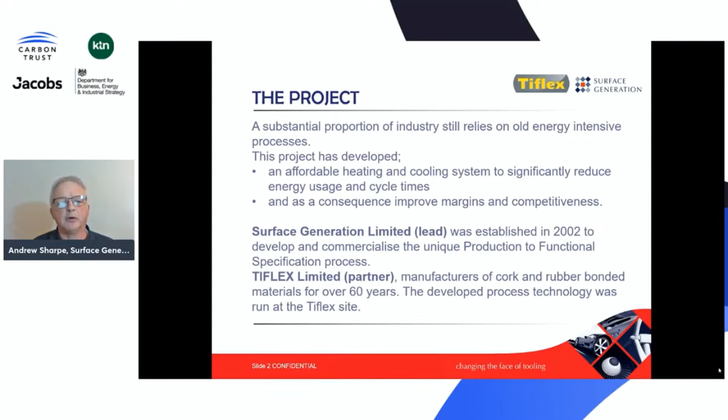So Surface Generation, we're the lead company. We were established in 2002, and we were developing a unique technology called production to functional specification, which is called PTFS basically. And Tiflex, a long-standing partner down in Liskeard in Cornwall, they were manufacturers of cork and rubber bonded materials. So probably when you step on a tube train, if you look at the floor, those guys probably made it.

So the technology is all about really zoned heating and cooling. What we were trying to do was take the mass of the tool out. So what we'd look at is a tool face, which is extremely lightweight, which takes very little energy to heat and cool. And what we're trying to do is just heat the tool face rather than the whole of the tool. So traditionally, you might heat a tool that's 50 kilograms in weight up to perhaps 130, 140 degrees C, which can take a lot of energy and a lot of time.

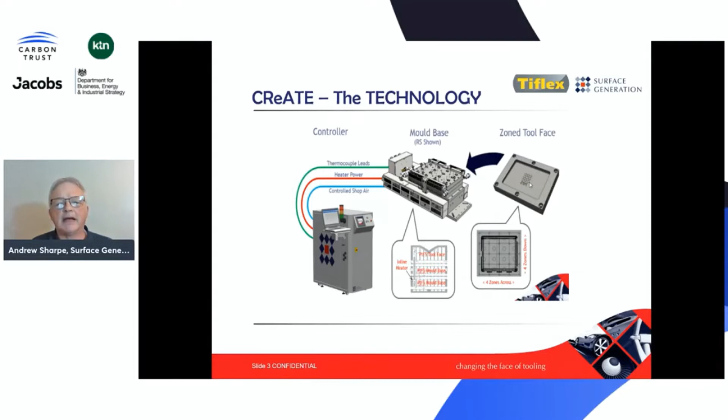But if you actually only heat the tool face, which weighs perhaps 2.5, 3 kilos, then the energy used to heat that up to 130, 140 is much less. And also the energy is far more directed. It's directed at the tool face rather than losses through pipes and things.

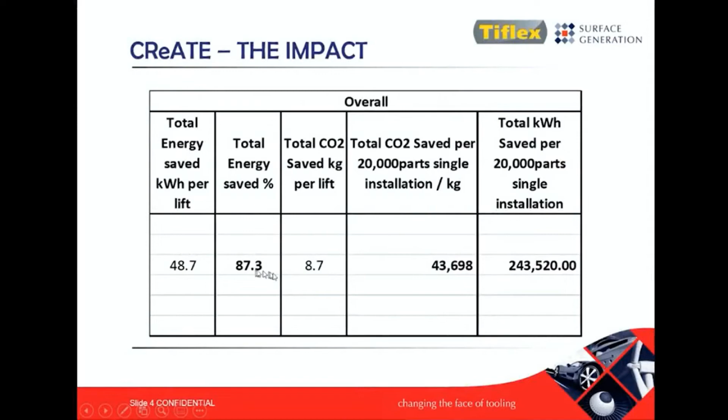So the impact of the project was actually pretty impressive. We were very pleased. In the proposal, we estimated about 82% energy saving. And in the end, we actually achieved 87.3% energy saving, which equated to just over 43 tons of CO2. And we were saving almost 250,000 kilowatt hours of energy.

And this was done because we lightweighted everything. We took a lot of the weight of the tool out. We directed the energy at the tool face. And we were able to then use a new control system, which enabled us to reduce that cost and reduce the cost of the complete installation.

Originally, our system was based on aerospace technology and was very expensive for just the molding industry. But on this project, as some of the benefits, we managed to reduce the cost of our system considerably to bring it more into line and more economic for the general molding industry.

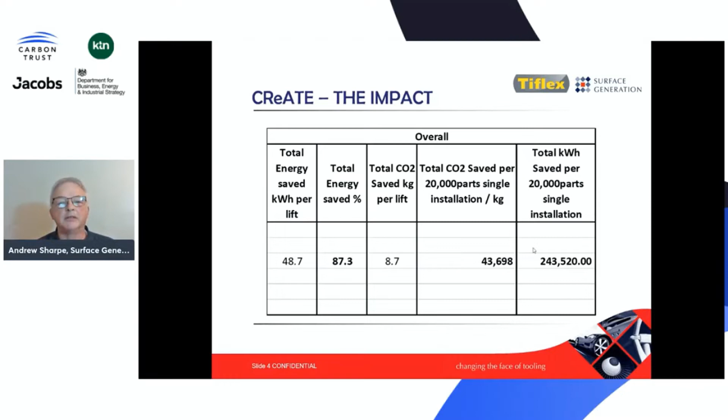Tiflex originally used steam heating to heat their tooling, which was very, very inefficient and used a lot of energy. And as I've just said, we saved 87% just using electrical energy over their traditional steam energy. And of course, today with the price of gas going up, which they use to actually create the steam, this is extremely beneficial to them potentially in the future.

So we were talking to Steve Ward, who is the R&D manager down at Tiflex. The lower energy consumption that we've shown them is obviously a significant benefit for them. If we can reduce their reliance on steam generation for heating and cooling, that'll allow them to grow a more sustainable business. It will allow them to have a more competitive business as well, which will allow them to hopefully have more money there to invest in further technology developments to reduce CO2 levels.

So what are we going to do next beyond the IEEA? Well, we're going to harden the tooling. So there's a few areas that we know we can just make slightly better. And we're going to exploit the developed technology in the general molding sector. So other companies like Tiflex who do general molding, compression molding potentially, that's something that I'm sure we can help out with.

And furthermore, what we'd really like to do, as well as the general molding sector, is look at other sectors which are very energy intensive, such as advanced composites. For instance, autoclaves use extreme amounts of energy. If we can find a way of eliminating the autoclave or reducing its usage by using our technology, then that'd be a great thing to do.

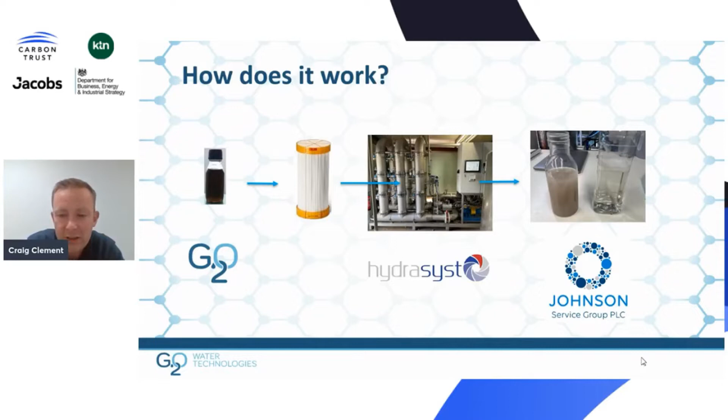What's been the impact of our project? What savings have we demonstrated? Well, the savings amount to more than £100,000 for the Shaftesbury operation. The largest financial saving is in the water. We've reduced water use by 60% by recycling, amounting to 24,000 cubic meters across a year. We've saved over a gigawatt hour of energy, based on a calculation of washer efficiency around 80%. We intend to further validate these gas savings with a 3-month test period with Johnson's from December to February 22. This saves around 200 tons of carbon per annum.

Good morning. I've been asked to come along today and talk to you about our IEEA project, the simulation-aided control of the drying process in the paper industry, or as we prefer to call it, twins.

The concept of twinning is not entirely new. The highest profile and one of the earliest examples of digital twinning was the Apollo 13 moon mission. At around 2:07 Universal Coordinated Time on the 13th of April 1970, when the Apollo 13 moon mission was over 330,000 kilometres from Earth, a dramatic explosion tore a hole in the side of the service module, leaving the spacecraft in distress.

Obviously, NASA put in place emergency procedures to bring the crew home safely, but then they were faced with the challenge of flying an untested spacecraft in a completely new configuration around the moon and back to Earth. In order to achieve that, they made use of the training simulators that had been developed to train the astronauts back on Earth. They converted the training simulators into models controlled by computers, and were able to model the performance of the spacecraft and the systems on board.

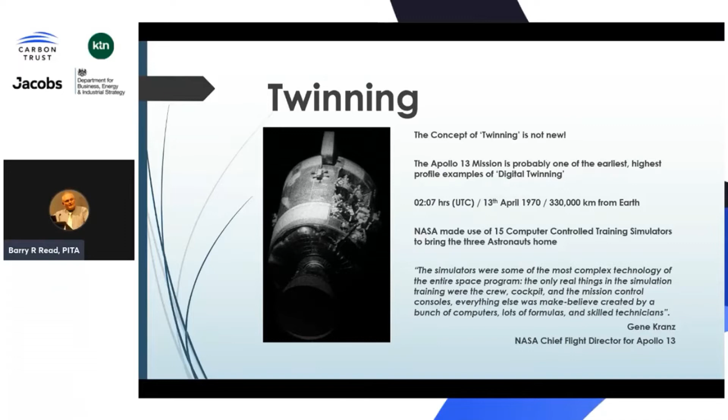It's important to make a few points about digital twinning. As I say, it's not new. The term was first coined in 2002. Historically, it's been used for relatively slow moving environments. But the first use of the term is in a NASA roadmap report. NASA are quite active in this. As the performance of computers has increased, so the capabilities of digital twins have increased alongside them.

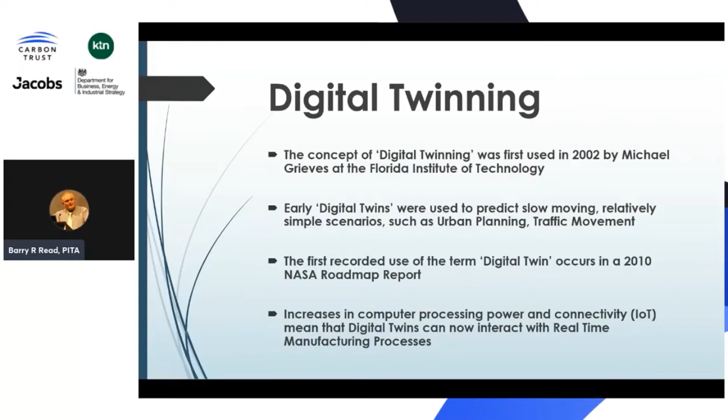A quick word about models. We're all used to using conventional models of systems. They tend to be data-driven and they are highly accurate within the bounds of an existing process, and they're used all the while. These can be extended to predictive models that can extrapolate forward with reasonable accuracy changes in that system, and those are quite widely used as well.

Mathematical models are different. Mathematical models go back to basic physical principles and mathematical equations to calculate variables either within or outside the existing boundaries of an operation. And this enables us to move into new areas outside of the knowledge that already exists within a system. To carry the space analogy forward, a mathematical model allows us to go where no man has gone before.

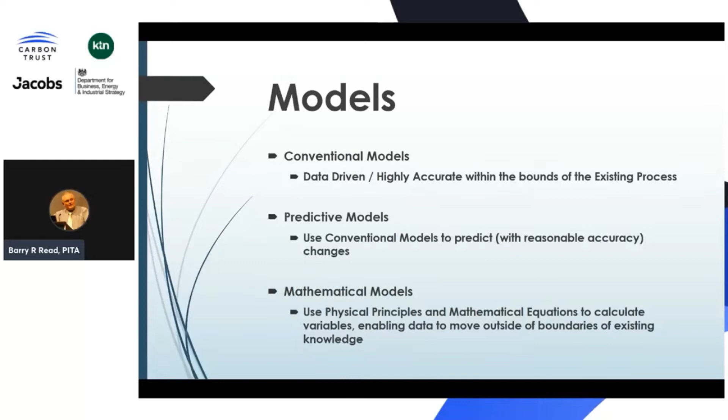Let me briefly introduce you to the project team, the partners. Obviously, the main one is Smurfit Kappa, who are the paper mill who allowed us to use their facilities. I'll tell you a little bit more about them shortly. CF Proxim is the key technology developer, based in Austria. Automation X is a process control specialist company based in Austria who work very closely with CF Proxim, and Perceptive Engineering is a similar process control company in the UK who work very closely with the Smurfit Kappa mill. And of course, propping it all up at the bottom, you've got the Paper Industry Technical Association, where I'm from, who are a membership association serving the pulp, paper and board industry globally.

A little bit more about the Smurfit Kappa mill. It's a 150-year-old site, which formerly had two older paper machines producing 230,000 tons of fine paper. Around 2014, that was converted to packaging grades, and they then subsequently invested in a new CHP plant to reduce carbon emissions. They're capable of making 260,000 tons of packaging paper, but with the drive towards lightweighting, that figure's been reduced to more like 230,000 tons because paper is produced in square meters rather than by weight.

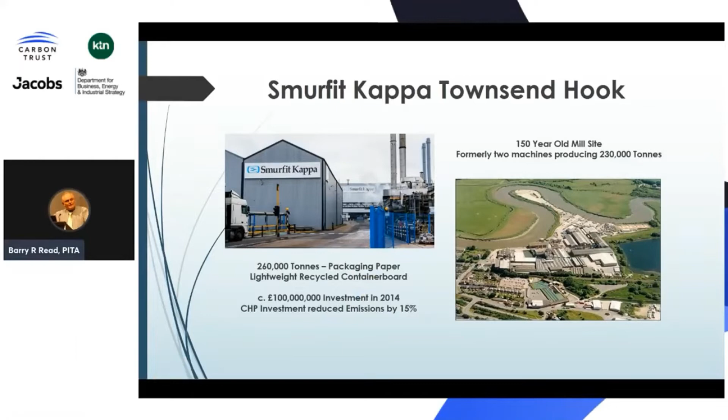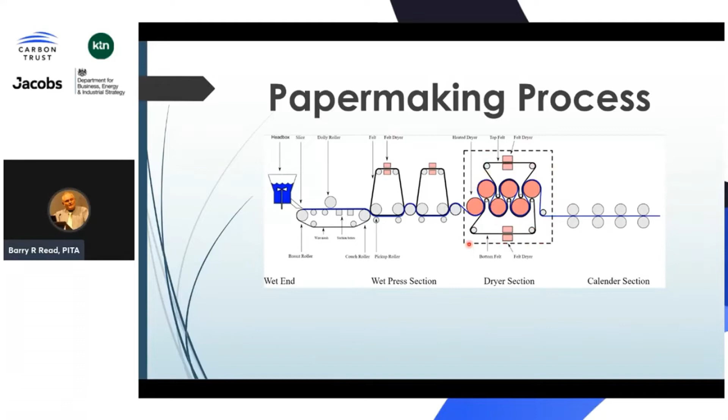This is the basic paper making process that the mill operates. We pulp paper up, we squirt it onto a wire like a sieve to let the water drain out. We then put it through two presses, very large mangles, which press water out of it. And then we take it into the drying section where we use heated metal rollers to drive the remaining moisture off. Now, the Smurfit Kappa system is slightly different to that, in as much as they have two sets of dryers because they add chemicals in between, but they're both basically the same.

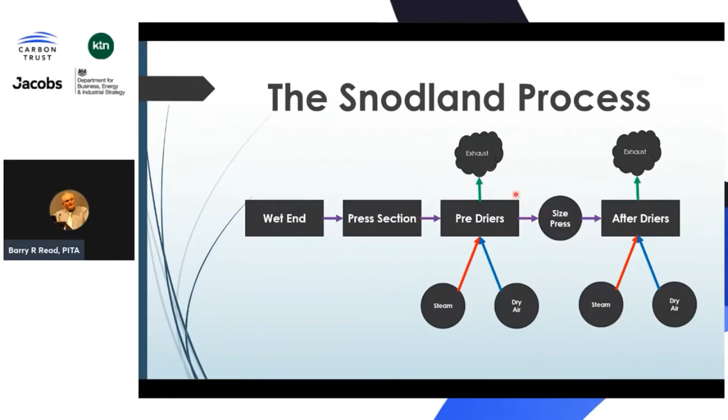Steam and dry air are put into the system, and warm, moist exhaust air is extracted to atmosphere. This is very fortunate because it means we can do work on one section and test out ideas that we're going to use on the other section, which is what we're doing at the present moment in time.

The achievements to date: it took a lot longer to complete than anticipated due to COVID-19, and nearly 600 days elapsed from our first meeting on site to our second meeting on site. But we got there, and as you can see from the graph at the bottom of the page, the results of the simulation and the measured results are exceedingly good.

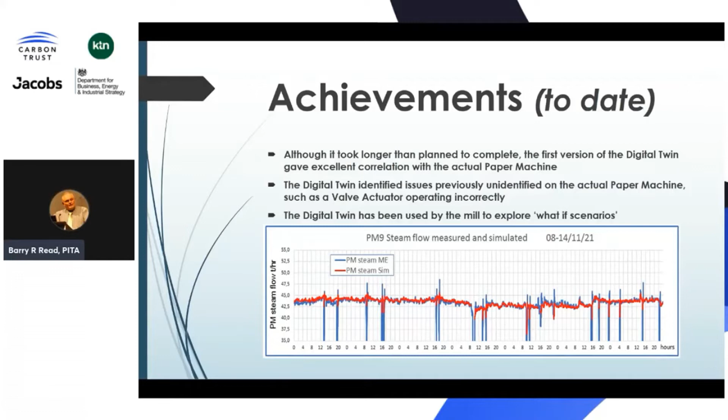The mill were very impressed by the correlation between the two. The twin has already identified certain issues on the paper machine that people didn't know were there before, like a valve actuator being connected inappropriately. It's also being used by the mill to explore what-if scenarios without putting production at risk. The mill are able to move outside the box while still making paper in the normal manner.

As I said before, we started on the after dryers, and the immediate results are that the exhaust fan speed has been reduced by up to 35%, so that's 35% less hot air being exhausted to atmosphere. We've reduced the supply air temperature from 105 to 80 degrees C with no loss of drying performance on the paper machine. On the after dryers alone, we're estimating a steam saving of 2 to 2.5%, which in papermaking terms is quite significant.

We also have a range of advisory functions. When the model sees performance moving in a particular direction, it is able to step in and make changes to the system. And we can also measure performance in key areas where it might not be possible to make any measurements.

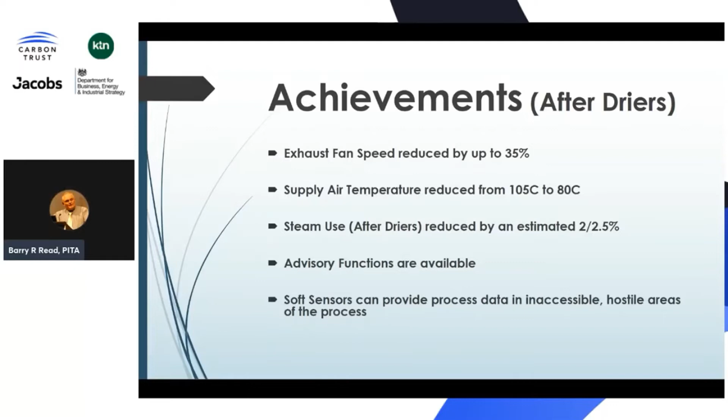This is a comment taken from the Operational Excellence Leader at the mill, a gentleman we've been working with very closely.

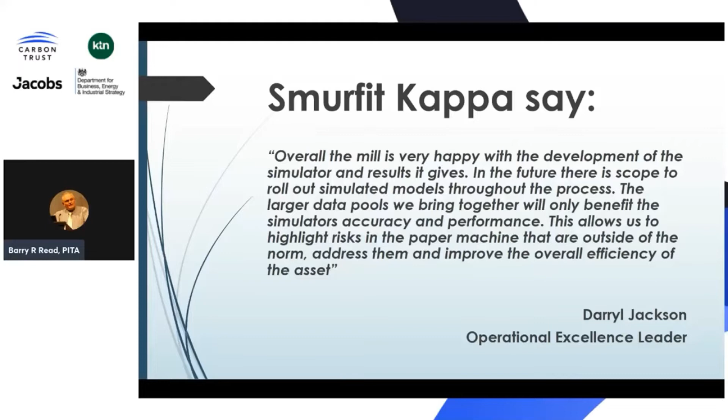So what next? We intend to extend the control of the pre-dry section, which could result in another 2 to 3% steam saving. We can also look at the heat recovery system in the condensate to save a further 1%.

The technology, well, there are 43 paper mills in the UK producing 3.6 million tonnes of paper. This could be replicated at the majority of those. And there are 894 pulp and paper mills in Europe, and this would be applicable to those mills as well. So the market potential is huge.

Thank you for listening to what I've got to say, and I hope you find it interesting. And to continue the space theme, live long and prosper.

Thank you, Barry. Now we're moving on to the Mineral Products Association. If you joined our panel discussion earlier today, you will have heard Richard Leese already mentioning their IEEA project. MPA have developed and tested low carbon multi-component cements for construction applications, thereby reducing the need for energy intensive cement clinker production. Richard, over to you.

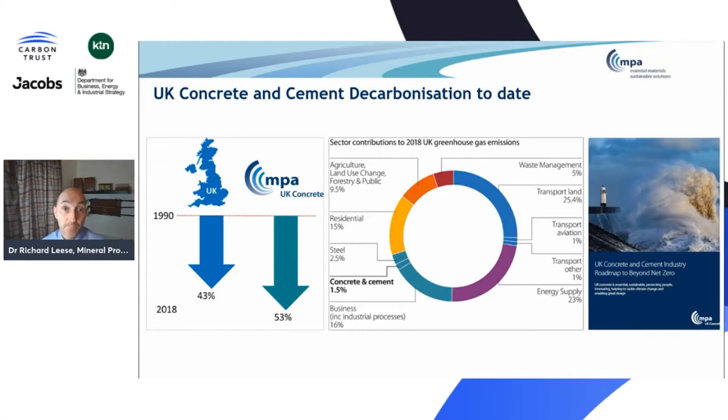No net zero journey can be delivered by industry alone. All actors, both supply chain and policymakers, need to play their role. The UK government has made some initial but important steps. The industrial decarbonisation, net zero and other strategies have brought with them government funding for innovation projects, and these are helping to deliver on the industry roadmap.

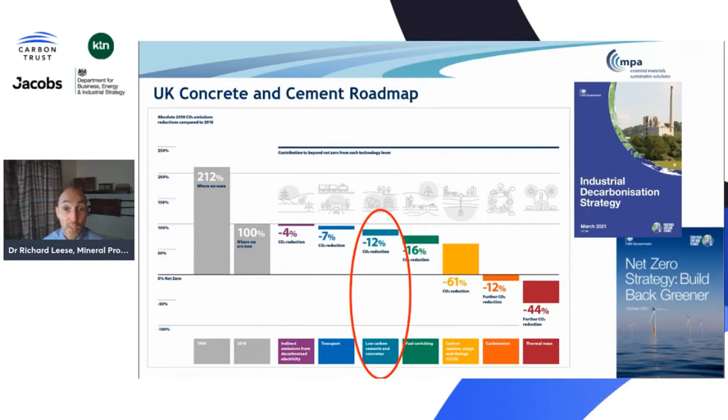MPA and our members are working together on collaborative innovations where the results are shared across the industry to maximise the environmental and business benefit. The low carbon multi-component cement project is one of our projects that will make significant contribution to the 12% reduction in emissions associated with the low carbon products lever of our 2050 roadmap.

MPA is the project lead in the project titled Low Carbon Multi-Component Cements for UK Concrete Applications. MPA provided technical expertise and design of the new cements. Hanson Cement carried out the manufacture and homogenization of the cement powders and tested the cements for conformity. Building Research Establishment tested the cements in concrete, and Forterra Building Products carried out the design and manufacture of precast concrete test panels for demonstration.

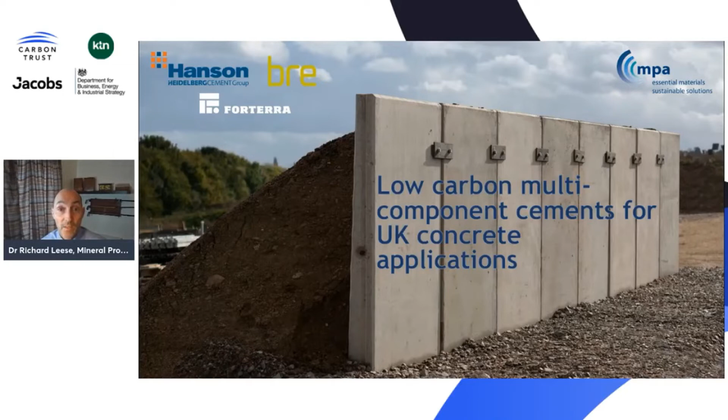And the demonstration photo of the 8 panels with 8 cements at a HS2 site with an aggressive clay backfill material for long-term durability testing.

In a 2-year program, extensive durability testing was completed on concretes containing the new cements, which investigated resistance to carbonation, chlorides, sulfates, freezing and thawing, and alkali silica reaction. The project successfully demonstrated that new cements require less clinker to achieve performance compared to reference cements.

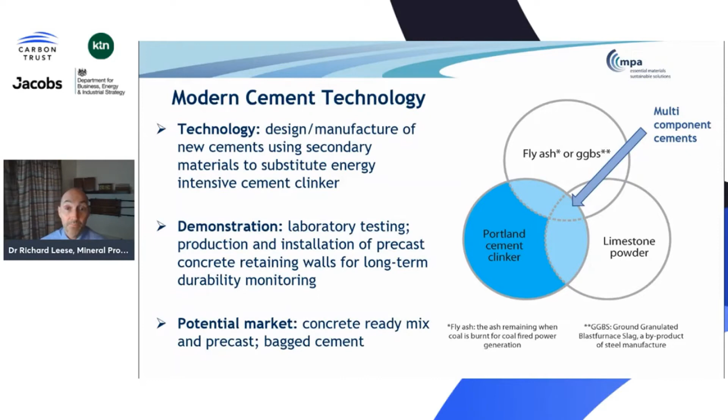Currently, 79% of the UK cement market sales is CEM 1 type cement, with a total market of 10 million tonnes. Of the cements in this project, one has a CO2 profile 60% lower than the current market leader CEM 1, a massive CO2 saving which equates to a 65% energy saving too. If fully deployed, this results in a reduction in direct emissions from cement production of over 4 million tonnes of CO2 every year.

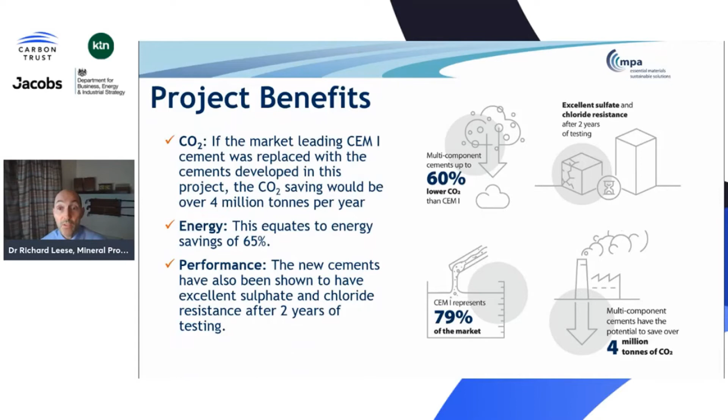That's a huge leap in our decarbonisation journey. On completion of the test programme, we need adoption and deployment. MPA's recommendations have been put forward to the British Standards Institution to include the new cement in the UK National Concrete Application Standard, to help designers, specifiers, contractors and the wider construction sector reduce emissions related to the use of concrete. I'm sure you'll agree that the IEEA funding has delivered real benefit here that will be experienced for generations to come in the low carbon built environment.

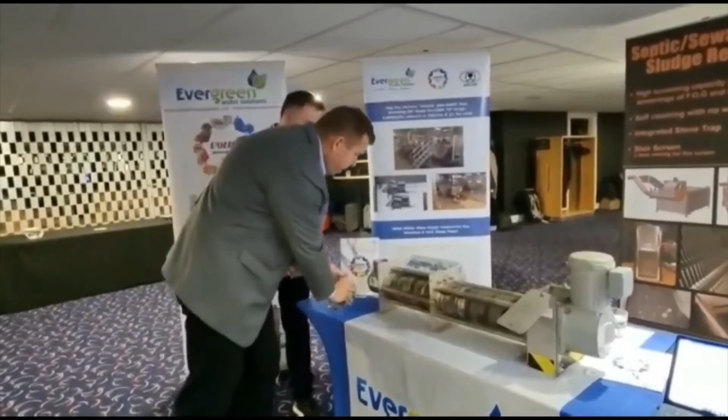Milo, can you explain to the audience why we were able to achieve those massive results in energy saving? Yeah, it's quite easy to explain. If we move to this demo, it shows how the cylinder of the volute looks. You can see we have a sludge inlet where flocculated sludge goes in. Then we divide the cylinder into two sections. The first one, the thickening zone, is where there is not much pressure applied on the sludge, allowing it to escape easily from the cylinder.

On the second part of the cylinder, as we call the dewatering zone, we apply already more pressure on the sludge in order to achieve a targeted dryness of the sludge cake. As you can see, the motor and the gearbox are all connected in one piece. For low maintenance, actually we can call it kind of maintenance-free solution.

The operation speed of the volute, we are talking about 2 RPM, which was exactly the case in the Davyhulme. And the power consumption, as Robert already indicated, per 1 ton dry solid processed, we are talking about 23 kilowatts in case of a centrifuge and 4 kilowatts in case of volute. So there is a dramatic reduction of the power consumption of the technology.

And fortunately, I have to say, many clients and operators are now focusing and checking their technology, how much carbon reduction, CO2 emission reduction they can implement into their system. So volute definitely brings this benefit when it comes to power consumption.

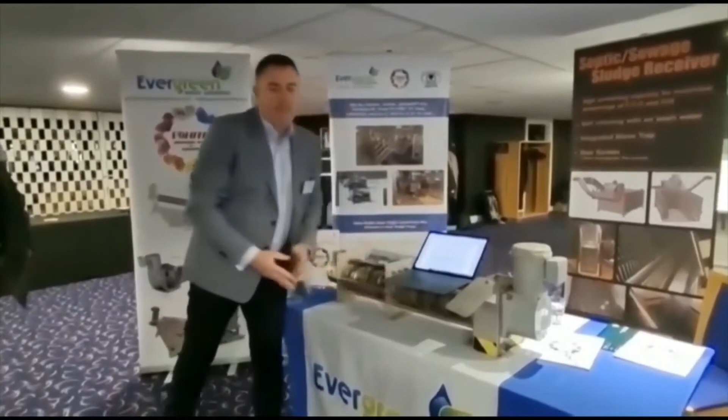So thanks very much, Milo, for explaining the technology. As you can see, the volute is a very simplistic process and very easy for operators to operate and maintain. The Carbon Trust have facilitated us to do full-scale trials with this technology. It's been the first opportunity for us to test at full scale and have direct comparisons between centrifuge and the volute disc press. I hope you've enjoyed this presentation and thank you for watching.

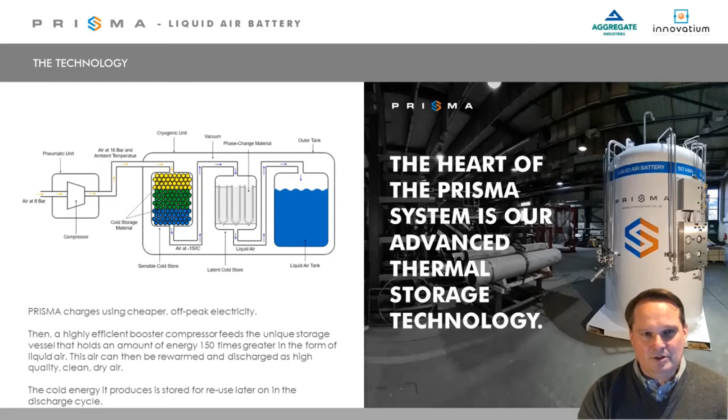Energy storage of this type and use case does not currently exist. Prisma represents a transformative step change in the way industry consumes energy. There are no alternative technologies that provide the same energy efficient storage. The Prisma project will result in a saving of 1,400 megawatt hours or 600 tonnes of CO2 emissions per annum for this site. We anticipate a further five-fold saving across Aggregate Industries UK operations.

In addition to these cost savings realised in energy efficiency, there are also significant commercial returns available from energy storage services to the grid. Prisma is significantly cheaper than existing energy storage options with an ROI of less than 2 years. Prisma's mechanical design is reliable and easy to maintain, able to operate at high cycling frequencies and has a lifespan in excess of 25 years. Prisma can provide users with up to 40% energy savings and hours of energy storage while actually making carbon footprint reductions synonymous with cost reduction.

Here is Kirsty McCarthy of Aggregate Industries. Hi, I'm Kirsty McCarthy and I'm the Sustainability Director for Aggregate Industries. Aggregate Industries is one of the UK's leading construction material suppliers. We have over 200 sites and around 3,700 employees. We produce and supply a range of construction materials, including aggregates, asphalt, ready-mix concrete, cement and precast concrete products. We also import and supply construction materials, we export some aggregates and carry out national road surfacing and contracting services.

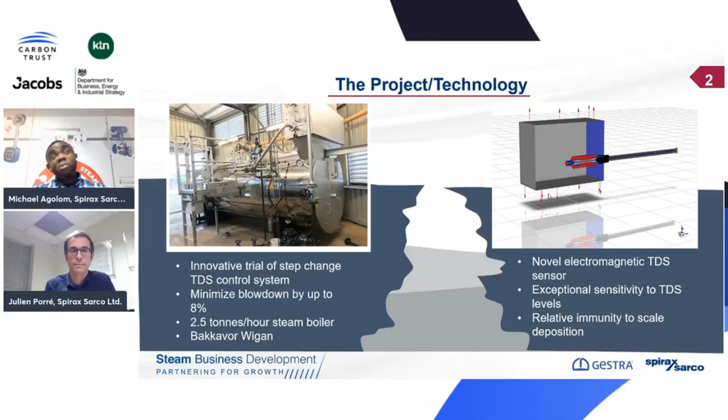The TDS control system is based primarily around a novel and step change in TDS sensing using electromagnetic sensing technologies. Over the testing period it has shown exceptional sensitivity to TDS levels, and it is relatively immune to scale deposition, which is the Achilles heel of existing TDS sensors, which renders them unreliable.

The journey so far has been very exciting and challenging. We started this project in 2019, developing a system of monitoring and benchmarking the energy performance of the boiler at Bakkavor Wigan. We then proceeded to designing and developing an industrial prototype of the TDS system. Between 2020 and 2021, we experienced a number of disruptions due to COVID-19 related delays, but we have now successfully installed and commissioned the system. We are now in the trial phase, and we should be completing that phase in the coming weeks.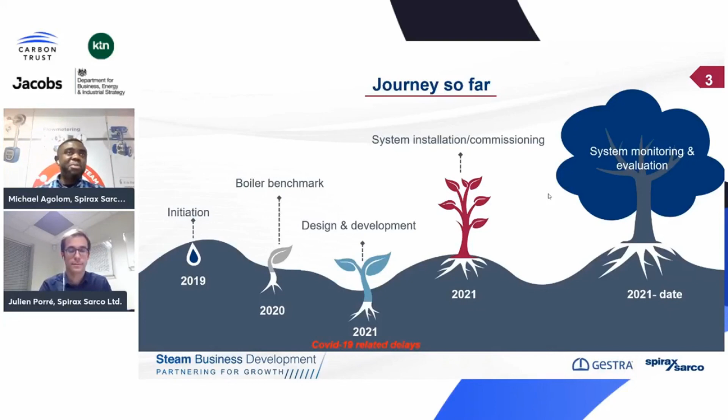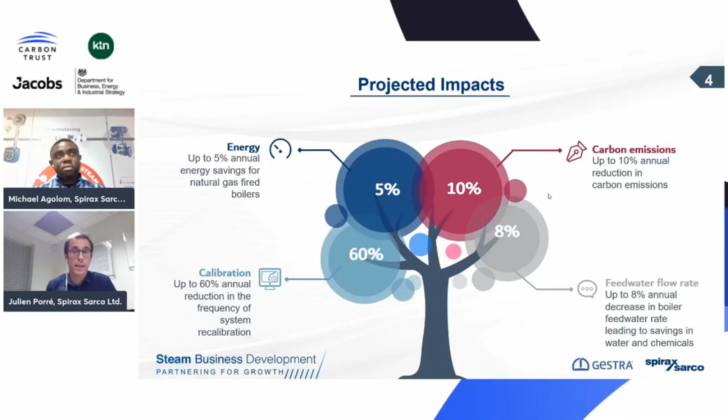The projected impacts for that technology could be really significant. Based on our current extrapolation from in-house testing, we estimate up to 5% energy saving for a gas boiler. Also, the calibration frequency will be reduced, so we'll save some time on calibration. On top of that, there's also an 8% feed water reduction that we envisage that will save a lot of water and chemicals. So overall, we estimate that the total carbon emission reduction will be up to 10%.

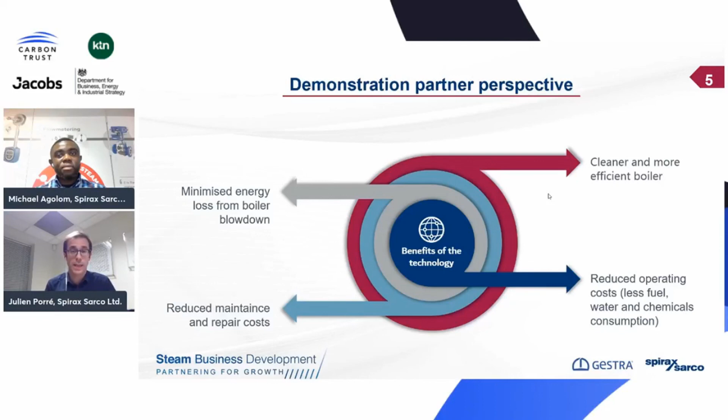From an industrial perspective, the technology can bring a world of benefits to boiler management. It will maintain the highest boiler efficiency possible while reducing capital and labor costs by minimizing the maintenance, as we said, and overall save fuel, water, and chemicals. First, we are looking forward to finishing the demonstration at Bakkavor Wigan and extending this to additional boilers on site. Once that pilot phase is validated, we are projecting to deploy that across the whole Bakkavor group.